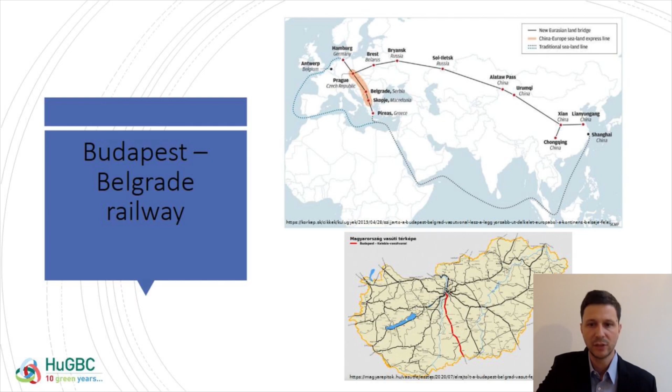Goods can be transported directly via sea from China through the ports of Greece and then further by railway to the heart of the continent. This is a major development which is ongoing and will be constructed within the upcoming years, and it has a very high priority for the Hungarian government. The project is also partially financed by Chinese companies and by the Chinese government.

The road infrastructure developments of the upcoming years also show big and huge activities, because more than 25 projects will be realized. That means more than 800 kilometers of new roads will be constructed in Hungary.

Again, we should remember what I showed you on the previous slides regarding global competitiveness and the special indicators related to transport infrastructure. Hungary already has a very strong position there. However, this position will be even more strengthened according to the governmental programs of the upcoming years, as just shown, related to railroad redevelopments or road developments.

However, when it comes to sustainability, we have many challenges. First of all, the infrastructure we have has to be maintained and kept in good condition. Even a German car manufacturer had an international commercial on TV showing one of their new cars, emphasizing that they can provide comfortable space even on such bad roads like Budapest has. So even the international public and visitors know about the relatively poor condition of Hungarian roads.

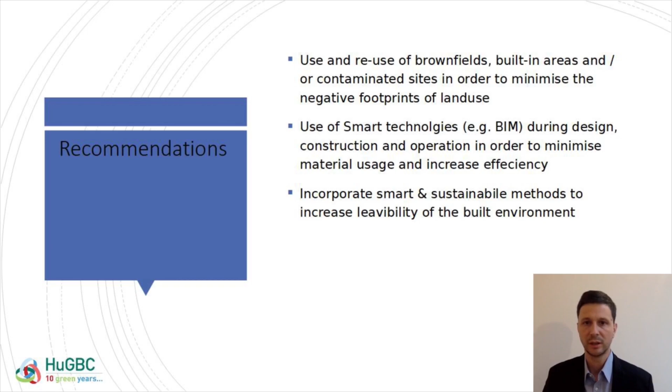The incorporation of smart and sustainable technologies and methodologies can also increase the livability of the built environment, which should be a very high priority, because at the end people are using the built infrastructures and built environment, and therefore their livability and long-term sustainability should be emphasized during all upcoming projects and works carried out by the building industry.

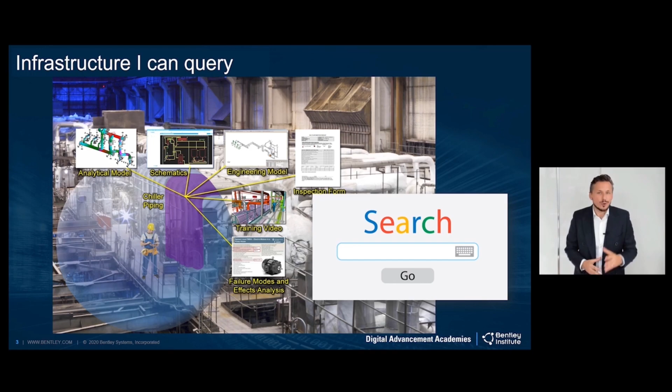First of all, I want to cover a little bit about what smart infrastructure is. For me, smart infrastructure is really infrastructure I can query - it's the ability to find things. You can see here an example of an inspection engineer who is able to access information anytime, anywhere, or even contextually.

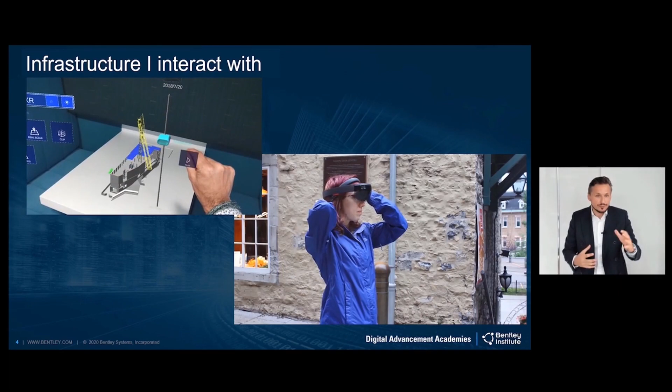It's also infrastructure I can interact with. Here I have put together two examples enabled by augmented reality technology. They provide you the ability to interact with things, visualize them, comment on them, and understand the infrastructure assets much better.

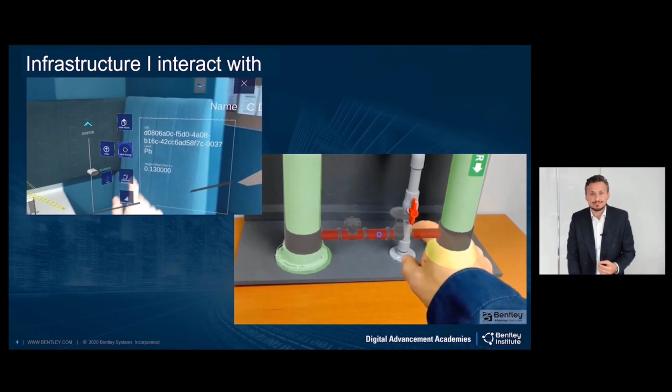It's also infrastructure I can talk to. Imagine being able to use voice control to interact with a twin. You can ask things like who is responsible for installing or maintaining the pump, or other types of queries.

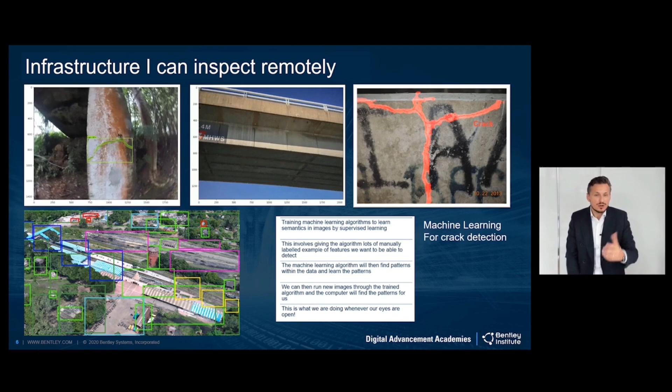It's also infrastructure I can inspect remotely. Here we are providing the ability to recognize things without human intervention. These examples show us recognizing cracks on bridges, from Singapore and Australia. Below, you see how we are able to recognize objects and potentially create a 3D model out of photographies. So here we are adopting machine learning algorithms for remote inspection.

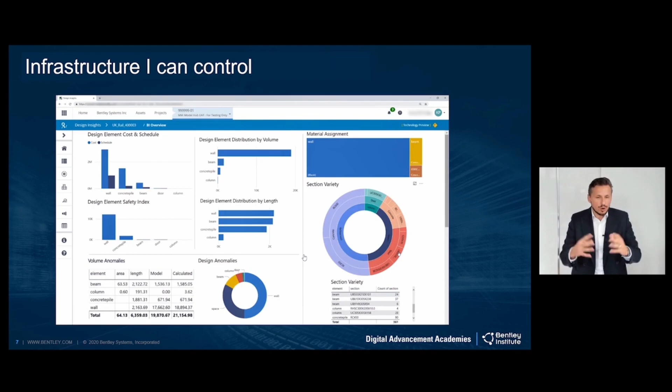It's also infrastructure I can control. Here's an example of a dashboard where you can actually start to have full control over project schedule, project costs, or other performance indicators. Again, it's about pulling these different data sets together to have a unified view.

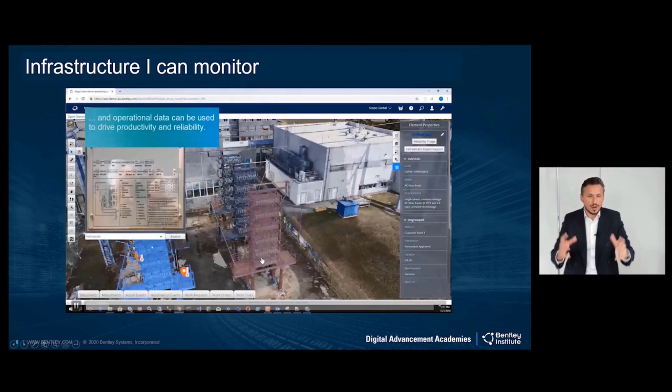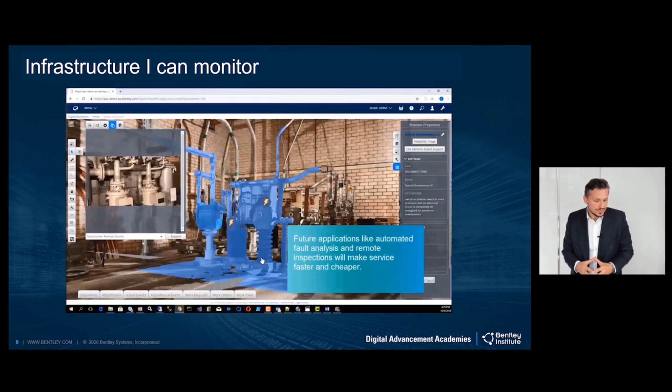It's also infrastructure I can monitor. Here I'm giving an example of a digital twin we have created for an energy plant, a power plant, and we are able to monitor the performance, the operating performance of a particular asset.

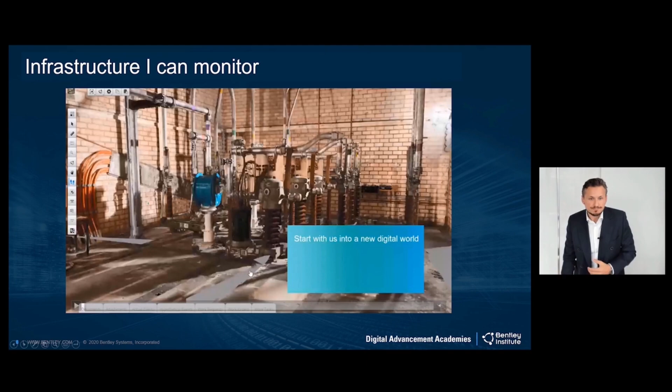Staying with the concept of monitoring, here I have put together an example for decision support. This is a tunnel. We worked together on this particular example with Microsoft to understand how we can monitor, for instance, the CO2 emissions in a tunnel. We are able to install particular sensors that will spot anomalies - in this case, you will see when the CO2 level or other gas emissions go up.

We can trigger certain alerts. We can also inspect the particular tunnel through cameras based on those alerts and potentially plan for any required interventions based on this scenario.

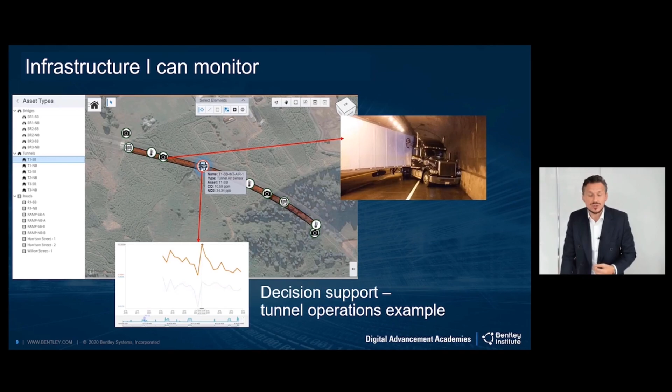So the key value for the digital twin, for me, really is making informed decisions - making sure that we can have an informed, reliable decision, answer critical questions such as who is responsible for certain actions or activities, when certain actions and activities should happen, and how should we react to particular conditions, ultimately to carry out key critical activities.

So the digital twin concept is ultimately quite simple. You have a physical twin and the digital twin. You can start to query the digital twin, you can start to ask all sorts of questions. Again, we can go back to this concept of Alexa or Google Assistant - voice control or any type of interface.

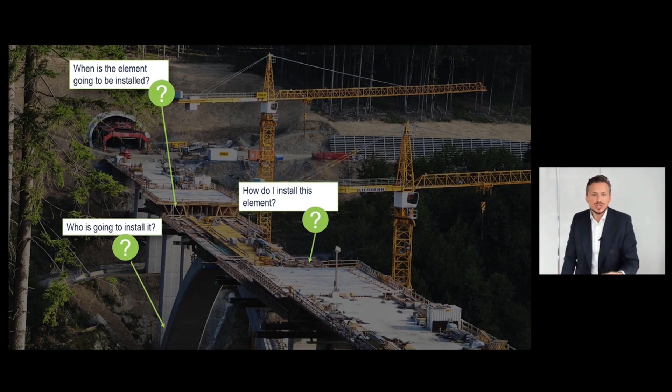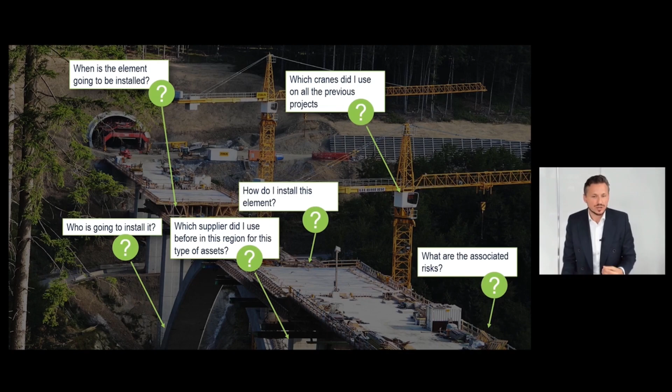So when is the element going to be installed? Who is going to install it? How do I install a particular element, or other type of questions? Again, it's not just for operations and maintenance, it's across the full life cycle of the asset.

The problem, nonetheless, we have is that based on various studies, only about 1% of data is currently analyzed properly. It is estimated that just 3% of data is currently tagged and ready for manipulation. So it's not really a volume problem. Infrastructure projects have a lot of data, but we need to learn how to leverage the data.

Ultimately, the digitally enabled infrastructure is about connecting, first of all, the as-designed description. So here we're putting together the contracts, requirements, permits, or other type of information which tells you what is allowed to be in here. We're also looking at other type of information, such as what is actually here. So this is the physical configuration of the asset.

So we can get it from inspections. And then on the other hand, we have information management systems which tell you what we say is here. So this is the as-built configuration or description of the asset.

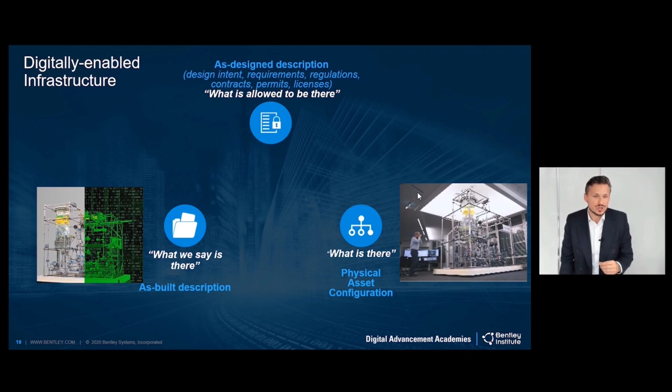The key concept is linking these three different descriptions and configurations together and managing the change in a proper way. So when something changes in the requirements, we can also make sure that it's reflected in our design and is reflected in our physical configuration and also in an as-built configuration.

And ultimately, based on these, we're also able, especially in operations, to monitor the conditions, because we want to make sure that we understand what the asset has been designed for, what type of performance we should be expecting from this particular asset, and then we're linking this back to the physical, what's actually happening in the physical world, and the as-built description as well. So the digital twin is really about linking all these different concepts of information and also condition monitoring and change management, change control.

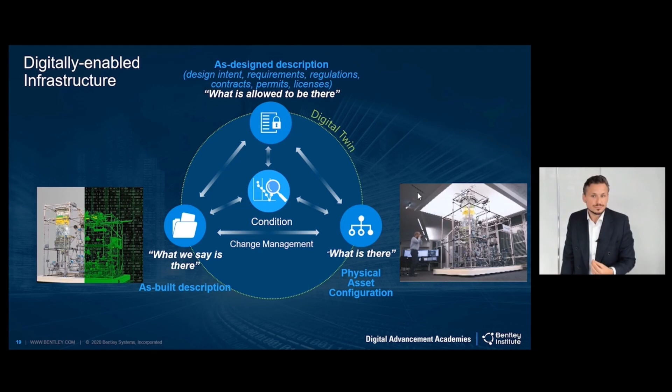So what are the building blocks for infrastructure digital twin? We have been working for about 2 years now on this model. We call it the digital framework. And the key building blocks are the 5 enabling blocks, which are strategy, culture, organization and talent, digital platform, and digital assets. And the digital twin is actually one type of the digital asset.

We then want to leverage these capabilities in digital workflows. We distinguish two types of digital workflows: project workflows, the capital project phase, and operational workflows, the operational phase. Obviously, as we go and execute these workflows, we will feed the digital twin with additional information, new data, so we have a constantly updated digital twin.

The concept I want to highlight here is that the benefits are not realized through these enabling dimensions. The benefits are really realized through the workflows, through the digital workflows. So we need to focus on which type of workflows do we actually want to enable here.

So some examples here: from the strategy, we have integrated digital and business strategy, because ultimately we cannot act in isolation. It's not just about an IT job. It's really a digital business strategy that helps to achieve business performance indicators as well.

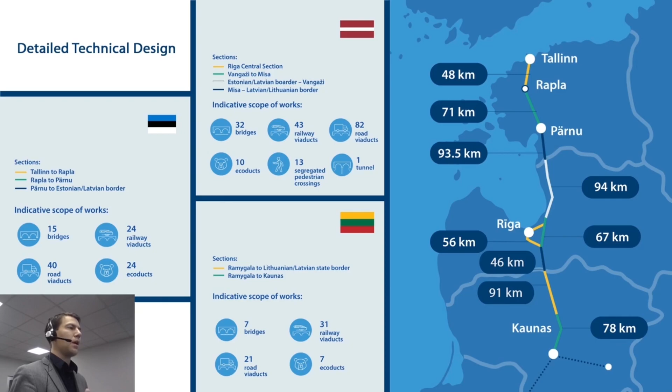Overall it's 870 kilometers, and currently we are in the design phase. This design has been split into 9 sections: 3 in Estonia, 4 in Latvia, and currently 2, but overall 4 will be in Lithuania. There are numbers about bridges, railway viaducts, road viaducts, ecoducts, segregated pedestrian crossings, tunnels, and different structures along this line, a huge number of structures in different places. This is a joint European effort to create this line and railway, and the number of companies involved is just growing as we advance into the design stage and soon into the construction phase. The number of participants will just grow and grow.

About the digitalization for this project: we started our roadmap back in 2018 with developing a BIM framework. It was followed by a detailed BIM strategy and detailed instructions for the market, and we sent a message that these rules and technologies are coming, so be ready, be prepared. Then we continued with procurement of software. As a client, we didn't have basically anything at the time, so we started to build everything we need, the whole ecosystem of different solutions and technologies around BIM.

Then we are into the design at the moment. So this is how I would describe where we are right now. We are still learning, still defining and fine-tuning some things during the design process, and soon we will enter the construction stage.

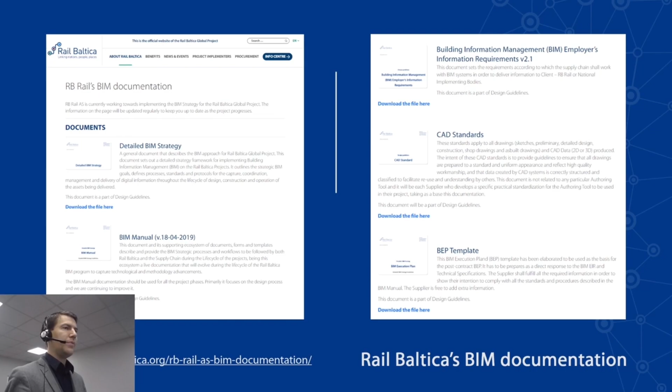When we talk about BIM, we usually talk about the concept of a common data environment. Our common data environment is not one data repository, not one place to store the data. It's an ecosystem of different solutions, and the main goal is to try to join them and fit them together.

We need to understand what each solution does and for what purpose, and integrate them. This is what we are now focusing on and putting effort into: making these solutions work together, understanding how to transfer information from one place to another, and avoiding as much manual work and data duplication as possible. It's not an easy or straightforward process, but this is where we are focusing.

If we talk about some results, as I said, we are currently in the design phase for the whole Rail Baltica line, and we have split the design into four major phases: site investigation, value engineering, master design, and detailed technical design.

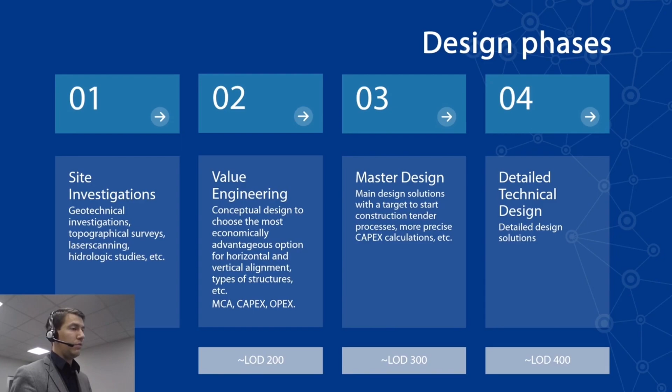It's not that you can translate these stages straight to LOD 200, 300, 400 for BIM standards, but these are approximate target numbers for each stage, what we want to achieve as we advance. Of course it depends from discipline to discipline, model to model, and item to item, but this is the approximate target. LOD is level of definition, which consists of level of geometry and level of information, and the information part is very important.

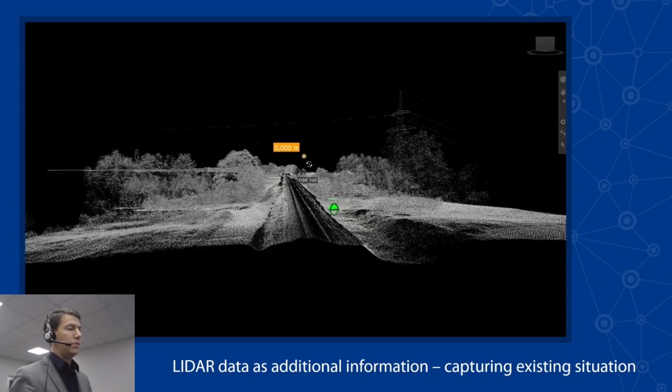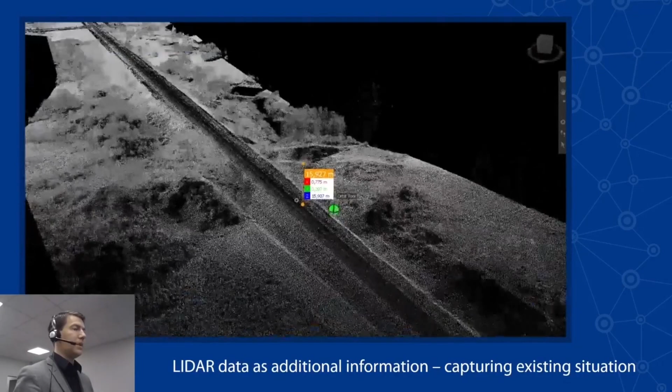Here are some examples of how the information is being reused. This is about LiDAR data, used as one of the means of collecting existing information. Of course, there's no point in just collecting data for collection's sake - this information has to be reused.

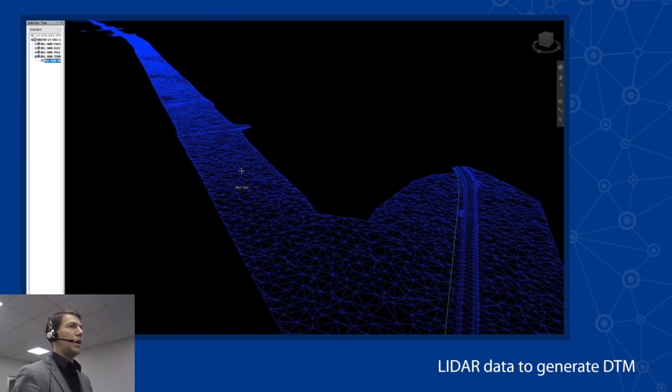As our project is mainly a greenfield project, we reuse this information to model the existing conditions, so that we can calculate volumes and earthworks more precisely. There's a lot of emphasis on collecting as precise data as possible, so the calculations are as accurate as possible.

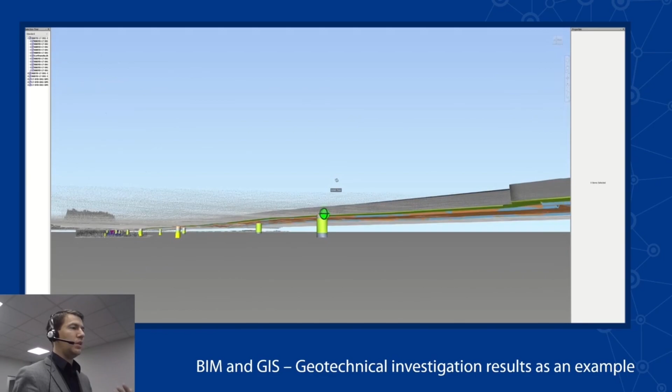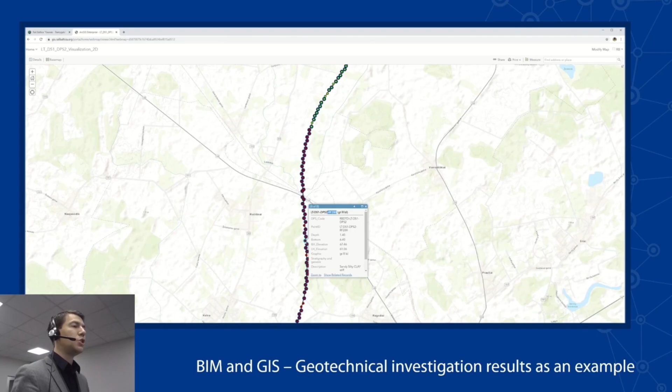It's not just about what is above the surface, but also about what is below it. Here's an example of geotechnical information and data collection, representing and reusing that data - reusing the same information in different platforms and solutions. This is geotechnical data in a BIM environment, and we can transfer that same information into the GIS environment.

It can be 2D or 3D, and there are different ways of reusing information once you've collected it, structured it, and know the purpose of what you want to achieve. It's just a matter of defining and developing standards and ways to reuse it and make the best out of this information.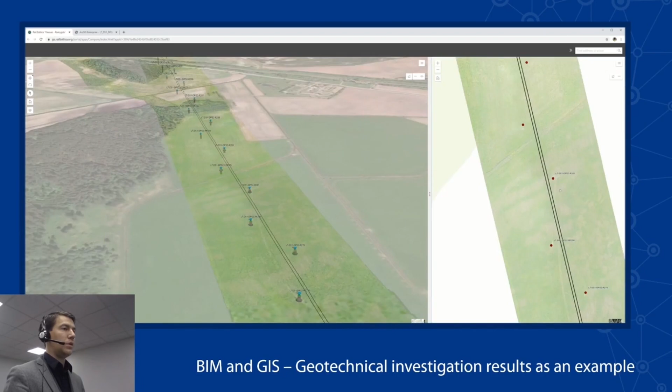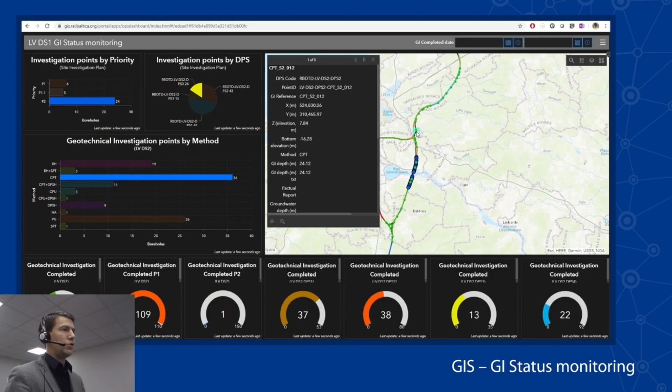Here on screen you can see ortho photos overlaid with topographical data and geotechnical investigation data, all put together. This is another way to review or follow the status of what is happening - for example, how much geotechnical data collection has been done for a particular section, what the progress and status are. You can follow this information if you have it structured, and reuse it in many different ways.

Just some screenshots here from what is in the BIM model on top, together with the LiDAR data, together with topographical surveys, and the visualization. So when the visualizations are created for PR purposes, for use with municipalities and communicating information with different stakeholders, you can reuse this information.

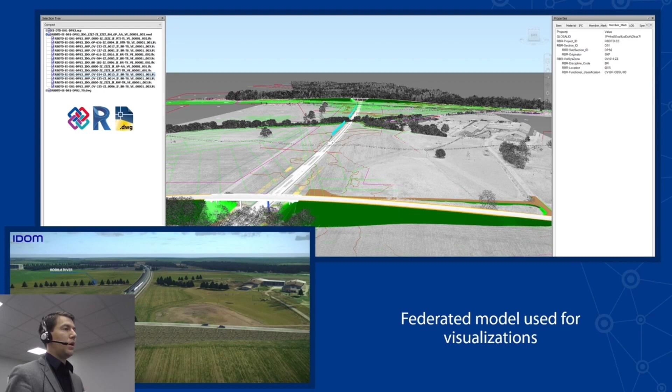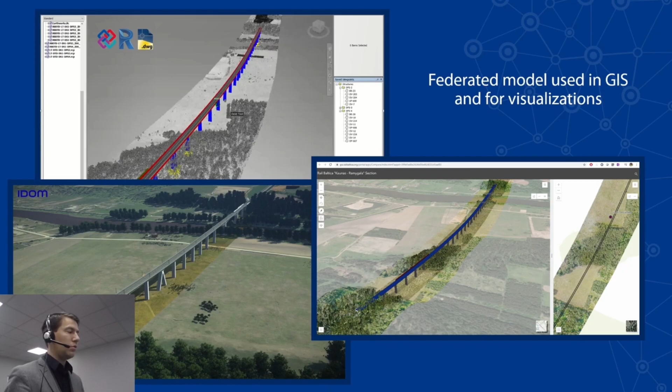It's not necessary to create new information. You can just take what you already have in the BIM model, reuse that information, and create these visualizations, or reuse the information in different ways. For example, here we have a BIM model, a visualization model, and the same structural BIM model inserted into the GIS environment, combining different means of information and putting it all together so that it all works together.

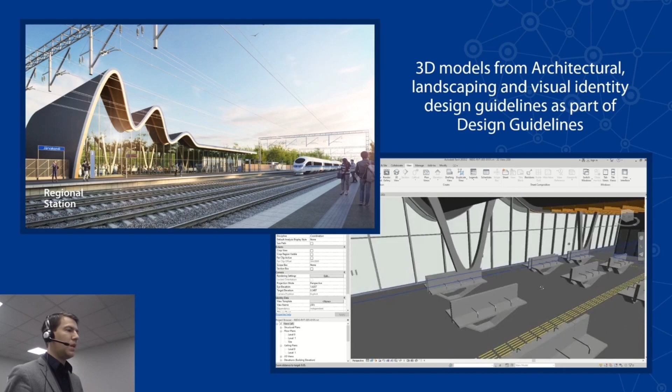In this example it's a Revit model, but mainly our strategy is focused around IFC. So we want to transfer, and we are trying to transfer as much as possible via IFC. This allows us to use different solutions and different software in developing the design.

As I said, we are a public company, a public procurer working as a client. We have different consultants and design companies working for us, and we have defined the standards and the ways how they should work, but the software is basically up to them, as long as they can comply with our requirements.

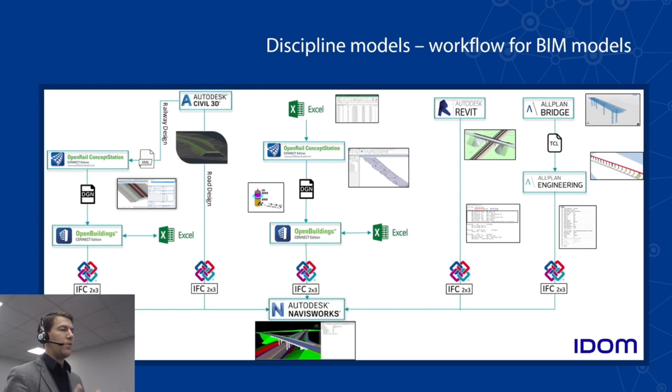IFC is one of those requirements, and attribute data within IFC is another requirement from our side. We expect delivery of this information in a certain way, how the information is categorized and structured.

For example, here is a screenshot from one model where all of this information is structured - what we want to collect about every object, every asset, and what we want to reuse later in different scenarios, when the railway line goes into operation and we have to maintain this information and these assets. This information has to be embedded so it's possible to reuse it.

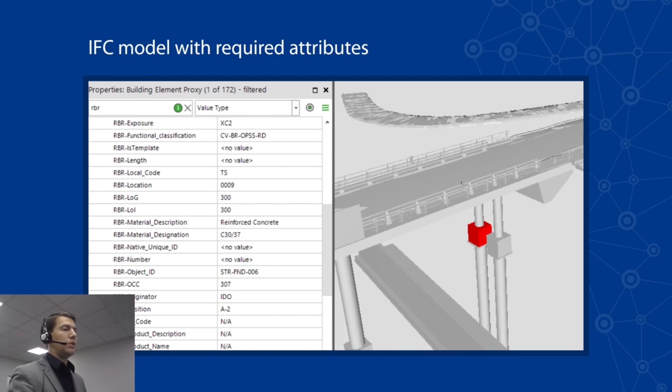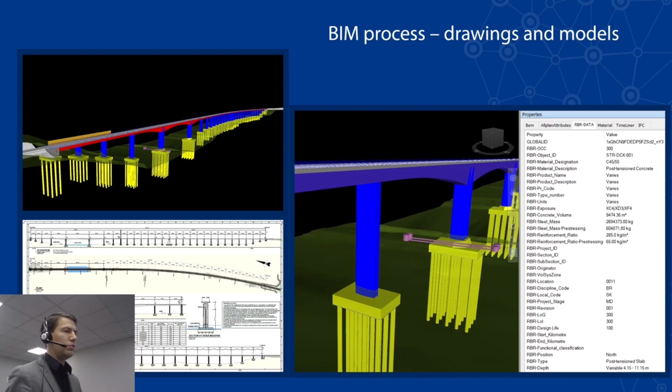Another example here - I have blanked out some items in the attributes due to security issues and reasons, but you can get an understanding of what kind of information we are collecting, how it is structured, and what we want to achieve with every line and every attribute we collect.

To end my presentation, I'll focus on some final acknowledgements, as I like to call them. You have to set clear requirements, and you have to follow the progress as a client. It's a learning curve for everyone - for the designer, for the consultant, and it will be a learning curve for the construction companies as well.

But you have to demand the result as a client, you have to dictate the rules, but of course you have to remember that a certain degree of flexibility is good, because the technology is not always there, and you have to think about the big picture.

So why are you doing this? What is the purpose of collecting this information? What is the purpose of these BIM models? What is the purpose of different technologies?

BIM, as I said, is not alone. It's just a buzzword that's been used in the industry for the last couple of years, but actually there are a lot of different great technologies around it. As I mentioned, GIS for example - we see GIS as being one of the core technologies around our strategy as well, and how to reuse all of this information we have collected.

And new things are hard. That's the last thing - everybody must learn, and it's not easy. You have to put a lot of effort into getting this information, structuring it, putting it all together. It takes a lot of effort, a lot of learning, and new things are just hard. It is what it is, and it will not come straightforward and easy.

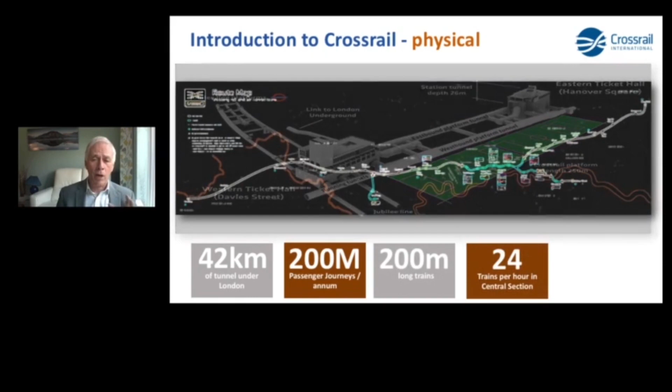As a brief introduction to Crossrail, it is a very large project that runs over and underneath London. Twin tunnels, 21 kilometres of twin tunnel underneath London, is the most complex section, but we're using full-size 200-metre long trains, delivering over 200 million journeys a year, which will increase rail capacity into London by 10% at a stroke.

Digitally, they're also very large - over 250,000 2D and 3D models, nearly 4 million documents, and a million pieces of equipment and assets. All of that goes to make a very expensive project, one of the most expensive projects in Europe at this time.

Programme certainly has been a challenge to us at the moment, but the cost has varied up and down. It's certainly not too much more expensive than the original budgets, and standards have come and changed as we've gone.

But the thing that I think is most interesting in the digital field is the way in which things have changed. When I started back in Crossrail in 2009, things like iPads and tablets weren't even in existence, but now we talk about Wi-Fi at stations, the Internet of Things.

There's a degree of complexity that time gives us across these major projects that we have to consider and exploit, otherwise we will lose the advantage in a digital sense.

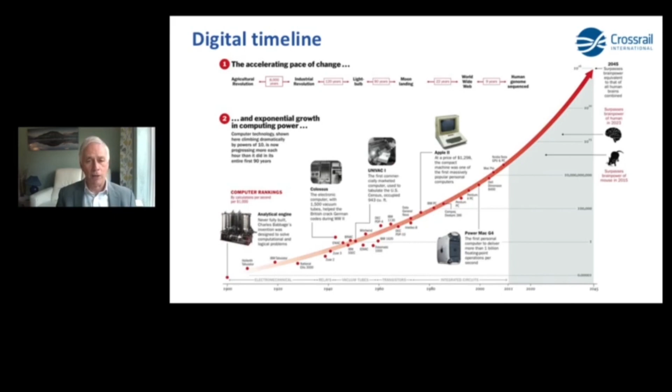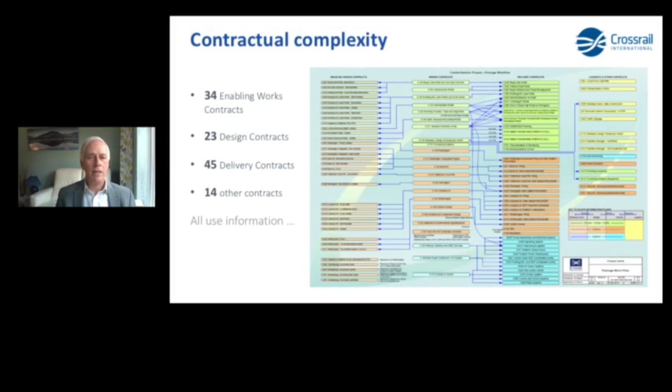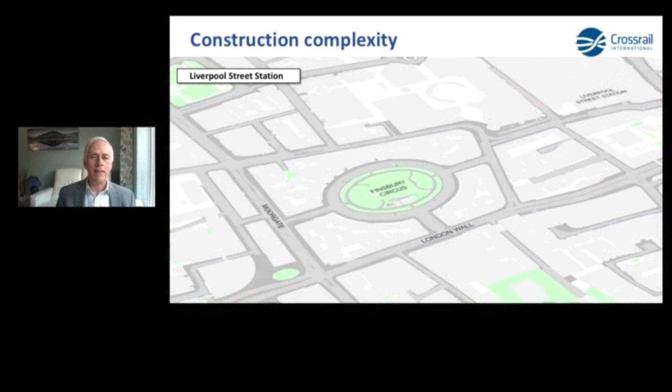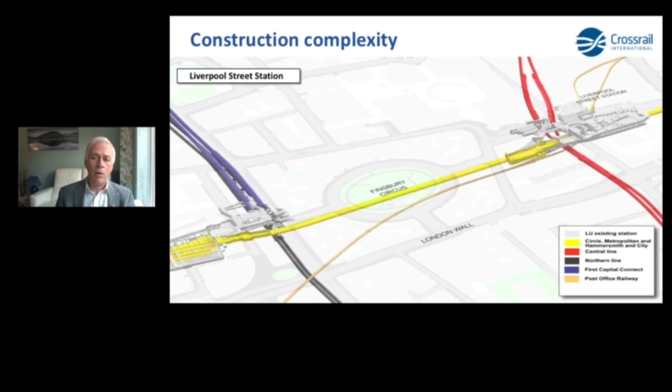There's construction complexity too. London's a very expensive and environmentally sensitive place to work, and some of these constructions, here at Liverpool Street, our platforms actually join two existing stations. That's the scale of the construction we're actually doing underneath London today.

The role of the client digitally is very critical. We, as owners of all the infrastructure, need to spell out and define the strategies that we should take. That in turn creates the collaborative BIM environment, and the need is to drive that across all of our contracts.

And that's where procurement is so critical - making sure that the strategies we have for design, delivery and digital actually come together and are appropriately integrated, to ensure they all work together and we get exactly what we want.

Some of the basics we have digitally - we talk about building two railways, the physical and the digital. We talk about BIM, the world of 3D modelling, and how critical our 3D models are in the early days for designing.

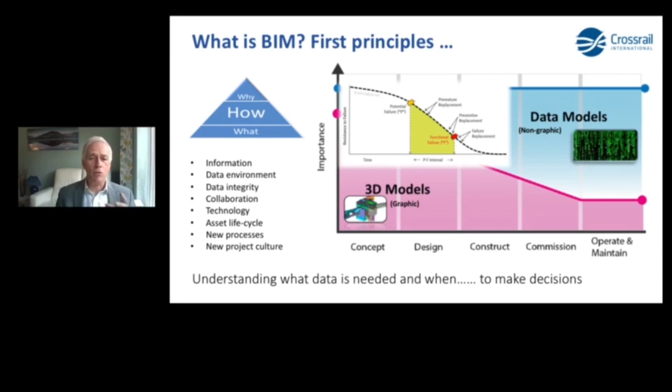But also the data models - things like condition profile of assets, and when we should repair and replace assets. Those models all come into our BIM environment.

So going digital has a number of characteristics. We need to define the end games - not just what information requirements we need for operation and maintenance, but also for building and creating the railway.

We need to think of a common collaborative data environment, where we put all our information, and how we leverage technology to get there.

And just think about making sure we get the basics - the asset classifications in place, location codes, design disciplines, contract codes - get all of those basics in place at the beginning.

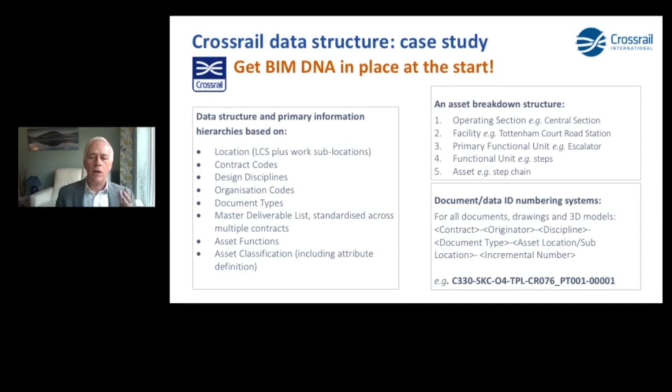Absolutely fundamental to creating a smart railway. And even simple things like standardized document and data ID systems, applied consistently across all of the contracts as standard.

Recognizing the relationships between different types of information, and particularly once you start adding sensors to things and using smart data analytics for managing performance, which is where digital twins comes in, there is an information loop that provides feedback for the way information works in these railways that we mustn't forget. It's not a static world that we live in terms of data, it's a live, interactive world, and we need to capture that.

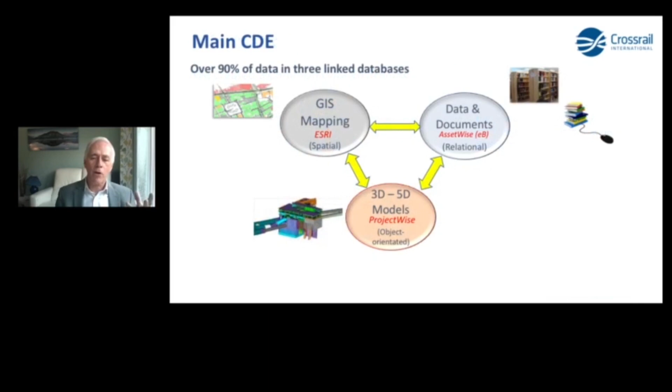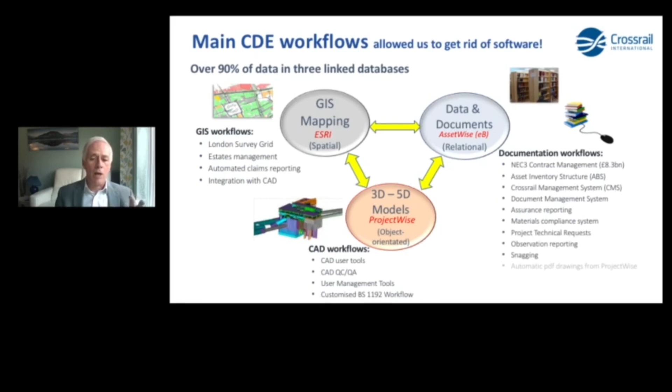So we need somewhere to store a common collaborative data environment. We talk about a single source of truth that everybody, including us as a client, requires to use so that we care and share all our information in one place. For us, it mostly comprised of 3 linked databases, and we actually used workflows instead of lots of different bespoke pieces of software to undertake all these activities, including £8.3 billion worth of contract management within our databases.

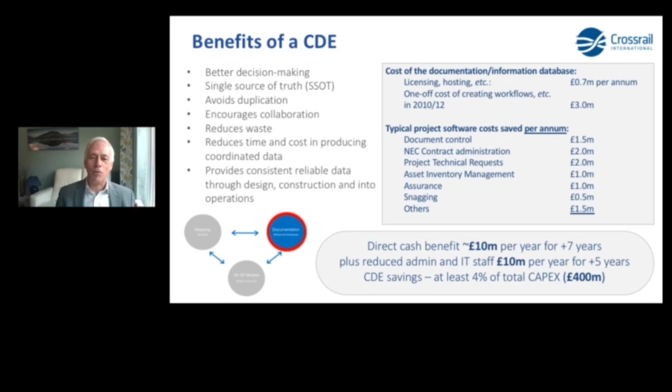Early on, we had a few workflows in our design contracts, but over time built up those workflows to manage and maintain our construction contracts as well. And the benefits were very significant: reduction of loss of data at each design phase, but overwhelming commercial benefits coming out of the way collaborative data environments can work, and these benefits were evidenced on our project.

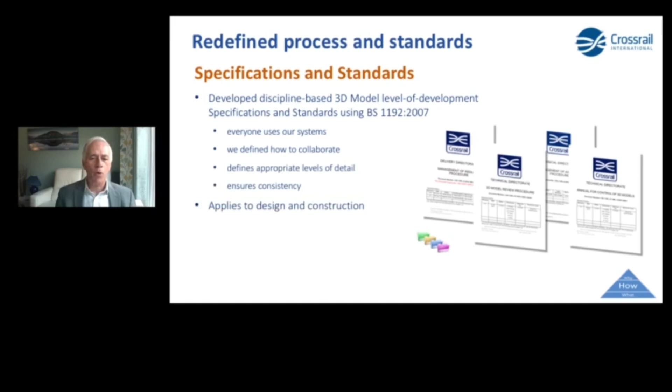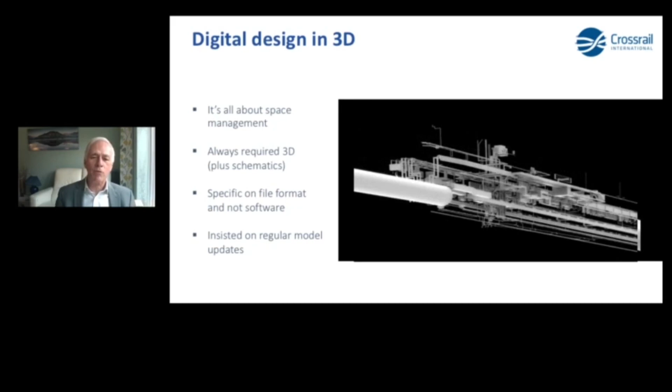Some examples of best practice: we had to create specifications and standards to explain to people how we wanted them to use our systems, how we wanted people to work together. In our 3D world, it was not about teaching people how to manage design in 3D - that's been going on for many years - but about the management of space by different disciplines and organizations.

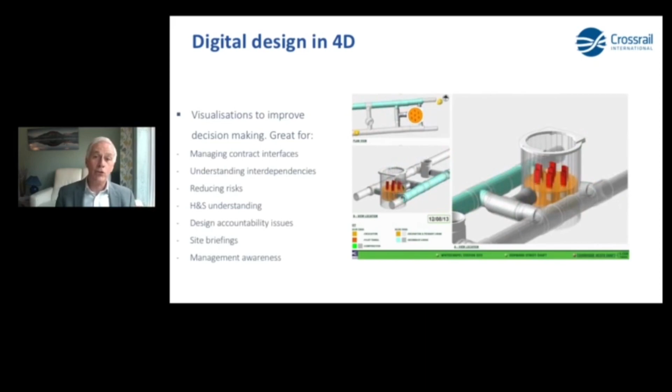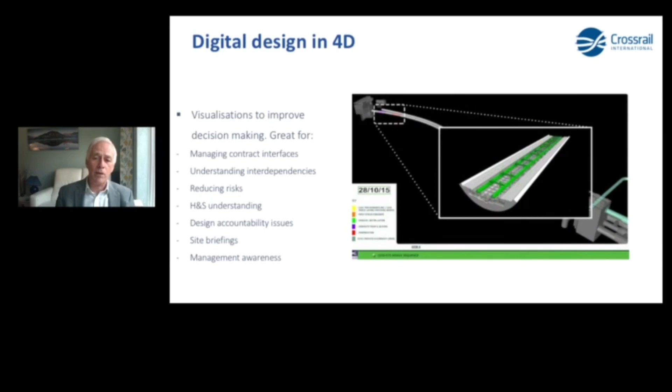It's about using 4D to help us as a client understand the way, for example, some of our station contracts interfaced with our tunnels, how some of the major station access shafts were being constructed, to show people how they were going to be created. And even here, where we had some of the floating track slab being constructed in very confined spaces, to show how that would happen in 4D.

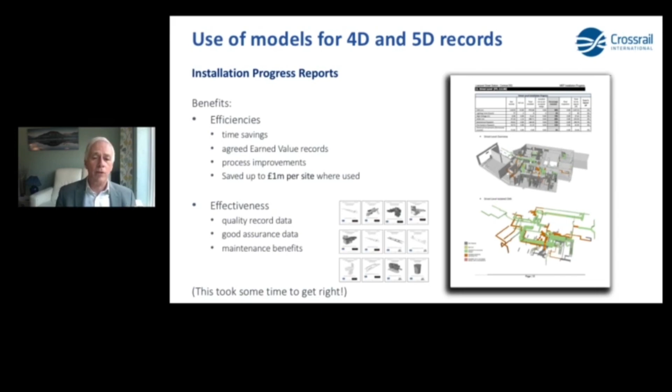We would take the models onto later projects, to many sites where the models could be used to help create progress reports showing how mechanical, electrical and public health would be installed, so we could control and manage installation over time. Using those models saved significant amounts of money over conventional ways of working.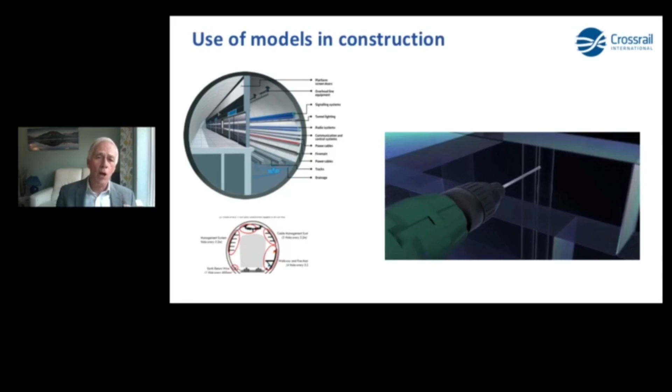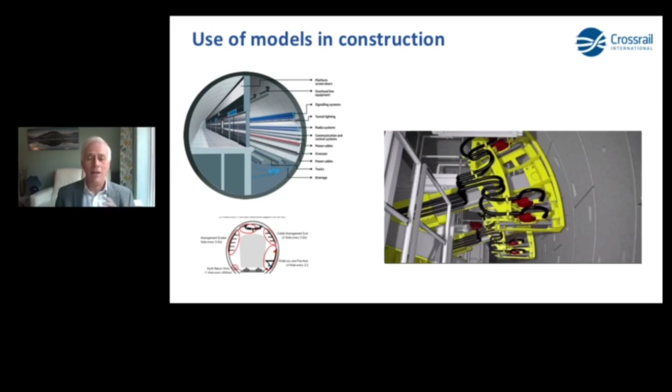And where we had in our tunnels all sorts of equipment needed to be supported, 250,000 holes to be drilled, the contractor did a 3D point cloud survey to understand exactly where he couldn't drill, and used an automated drilling machine to drill exactly where the 3D model told him, to drill effectively and efficiently - saved by a factor of 5 in terms of our program times using this method of construction.

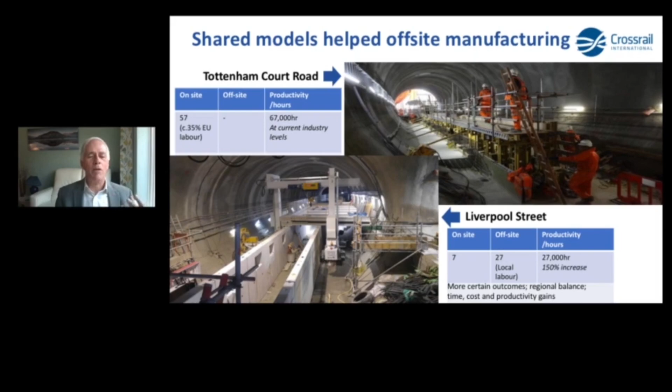Also giving the models to our contractors for information so that they could develop new ideas and ways to improve, and certainly off-site manufacturing evidence to show how beneficial that was.

A couple of other thoughts: just as you create the physical world of concrete and take concrete cubes to check quality, here in data and information it's the same. Create and check the quality of your information as you create it. Don't wait till your site's completed - very critical.

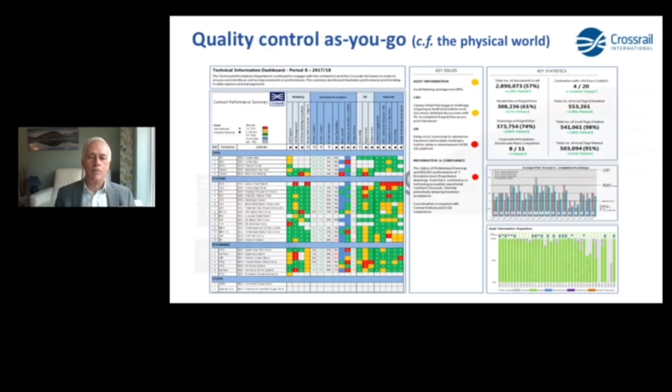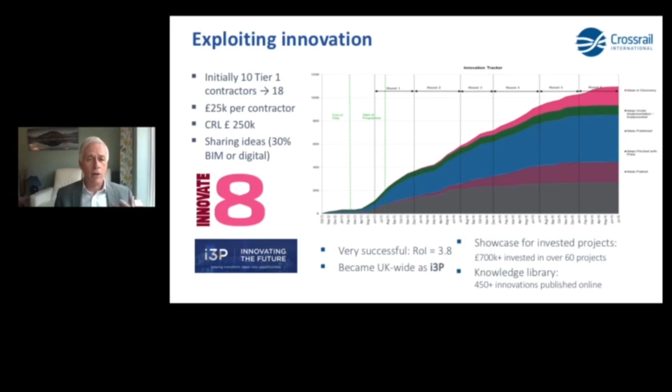Also, because of that timeline and a change of innovation, we used an innovation initiative to tease out a lot of ideas - over 1,100 ideas from our supply chain, where contractors and Crossrail put money into a fund to produce lots of innovative ideas. Very critical for me, because of those 100 funded ideas, a third of them were in the BIM and information management world. And absolutely unequivocally, every 6 months over a period of 3 or 4 years, when we audited the performance of our contractors, those performing best in terms of program, commercial, health and safety, quality and information were always those that were innovating the most. So although it can be counterintuitive from a project management perspective, encouraging innovation was critical.

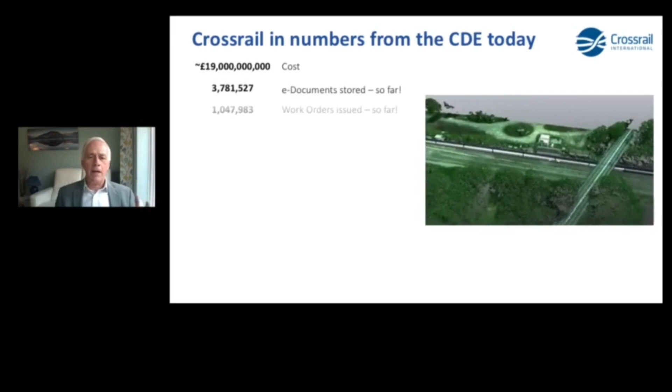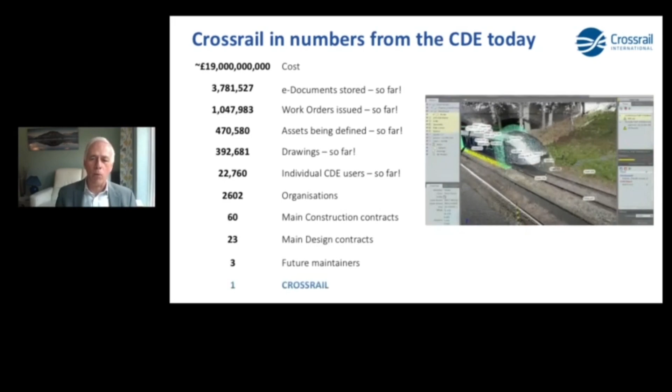Well finally, everything I've talked about and a huge amount more is all on our Learning Legacy website, which I would absolutely commend to you if you want to find out more about Crossrail. But looking at Crossrail in numbers, it is a very large project with many thousands of users, many thousands of organisations coming together to create one railway. Going digital has absolutely made that possible, and I would commend to you that all projects should be digital.

That approach from a common data environment, understanding what you need to create, produces much better decision making with very positive outcomes in terms of costs and benefits. But you absolutely do need a digital strategy to make that happen.

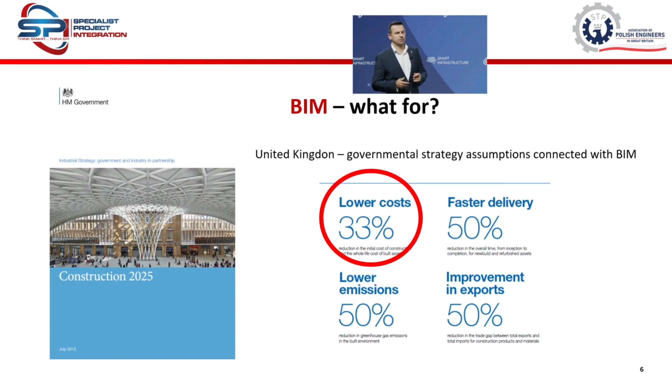Central Europe and Poland - where we are over there. It's a pleasure to mention some rail projects like Rail Baltica or the Solidarity Transport Hub in Poland, thinking about how to implement it, creating the strategy now. The private sector already knows the rules, already knows what kind of benefits they can get from BIM. We've got some examples of recent BIM projects in Poland. In this particular slide, those pictures show a few general examples, but believe me, the majority of investors know what BIM is and what kind of benefits we get from that.

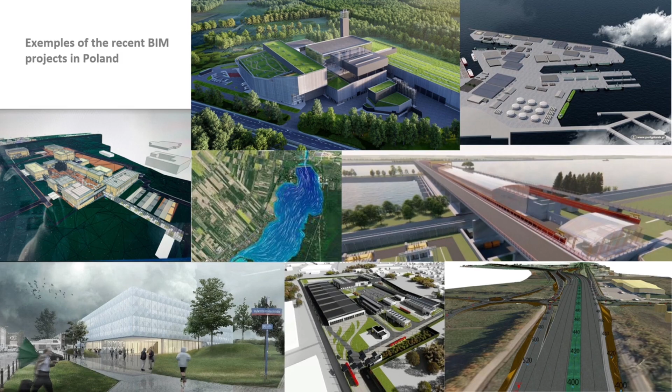Also in Europe and in Poland we've got some initiatives. Let's say BIM standards tell us the best road to implement BIM. infraBIM is supporting that process for the public sector and the private sector. STP, the Association of Polish Engineers in Great Britain, decided to create a special program, a special project which we're calling BIM for Poland, to share BIM knowledge from the UK to Poland.

BIM in practice - examples, how to do that. SPI, Specialist Project Integration company, has massive experience about the methodology. It covers all subjects, starting from strategy, going through training, and full implementation. To achieve success, you have to know the subject.

So let's talk about 4D and infrastructure modeling and simulation. We prepared for you some program simulation from Liverpool Lime Street Station. If you've got a massive infrastructure project like this one, similar to the train station in Warsaw which very soon will be rebuilt, you can see on the right-hand side hundreds of tasks to achieve, to reach the milestones.

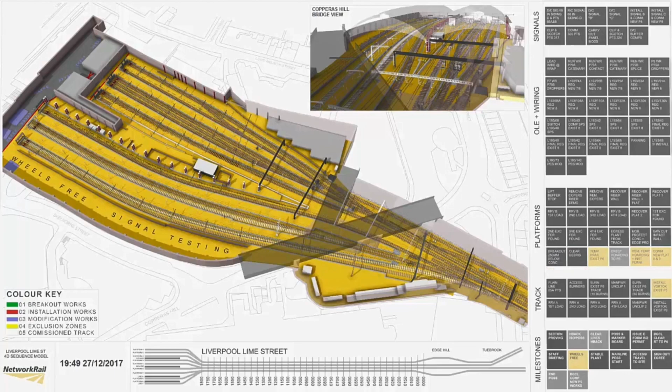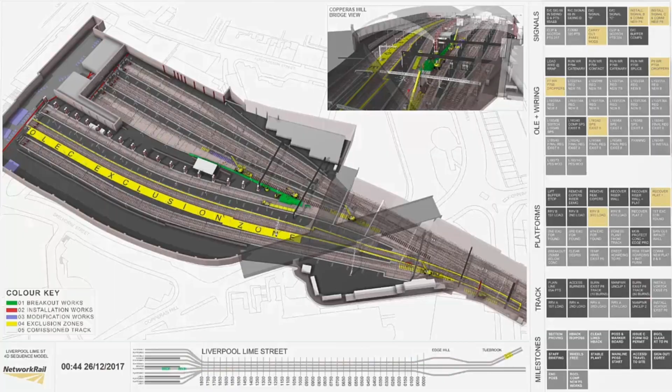And if you have to be 100% sure you'll be on time and on budget, you need something which is going to give you that - that's the 4D program. Anytime, anywhere, you can get the information on where we are with the project. So, one source of truth. If we've got that first step, we can easily jump to other achievements, which is 4D, which is augmented reality, etc.

Let's go to the next subject, which I would like to briefly discuss: common data environment management, supporting document control.

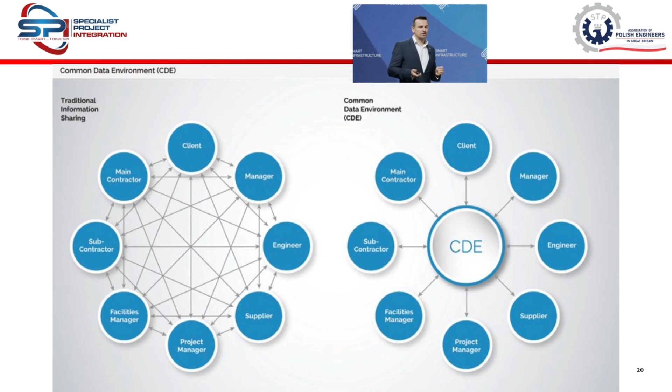On the left-hand side, you can see traditional information sharing. That is showing you the information going from client to manager, from manager to engineer, so it's a long road. We are losing time and money. To avoid that kind of problem, we should use BIM methodology, which is to create one source of truth, a common data environment in the middle, and create simple access to that information for everyone in the process. Then you've got a guarantee.